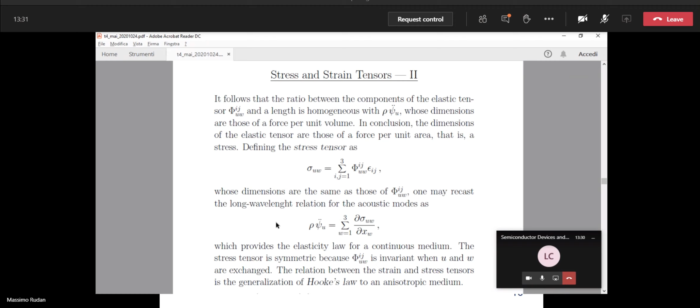Hooke's law was stated, as you remember, by the end of 1600, and substantially the first expression of it was that the tension was proportional to the force.

It is curious that at the time in which Hooke decided to make his discovery public, there was no copyright. People typically copied results from one another, so scientists liked to keep the results hidden somewhat in order to be able to reveal them at the proper time. So what Hooke decided to do was reveal his law by an impossible anagram.

The anagram is indicated at the bottom of the page. In essence, he translated the law into Latin, ut tensio sic vis, that means tension like the force, or same as the force. Vis is force in Latin. And then he simply scrambled or shuffled the letters of this sentence and put them in alphabetical order.

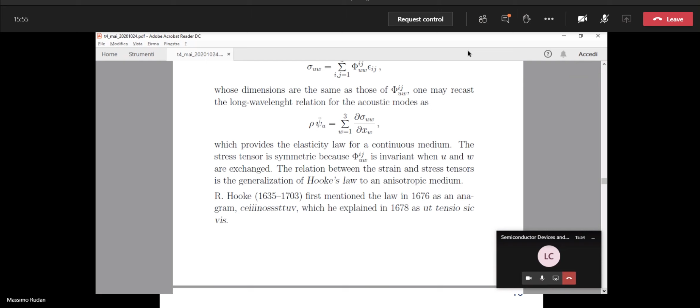So if you keep the tensor form of the law, you must express the law in the most general form, that is the one shown here. By the way, this law is a general definition that also applies to the dynamic case. In fact, sigma in the second equation visible on this page is actually the same sigma as above.

But in many situations, we don't have any time dependence of the different quantities. We have some equilibrium situation in which the material is subjected to forces, so it undergoes a deformation, but after the application of the forces is completed, nothing moves anymore. So the law also applies to the equilibrium case, and in many situations later on we shall examine equilibrium cases. We shall come back to the more general dynamic equations at the end of the analysis of elasticity, but from now on, we consider only the static cases.

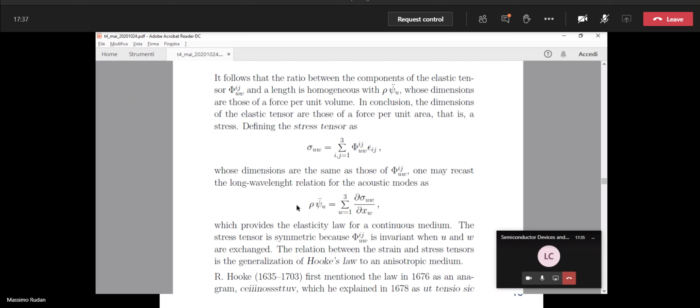Now I have to change the slide in order to go back to the slide we were discussing yesterday at the end of the last hour. So we were here. This, as you remember, is just a very simple one-dimensional application of Hooke's law.

We have a cylindrical piece of material that is elongated in the vertical direction, and the length of the unperturbed case is L0. We apply a force on the upper face while the lower face is kept fixed, and there is an elongation delta L0 of the bar. The stress in this case has only one component, the vertical one, given by the force F divided by the area A0 of the cross section.

And the component of the strain tensor epsilon is delta L0 over L0. Also, the ratio between stress and strain is called the Young modulus.

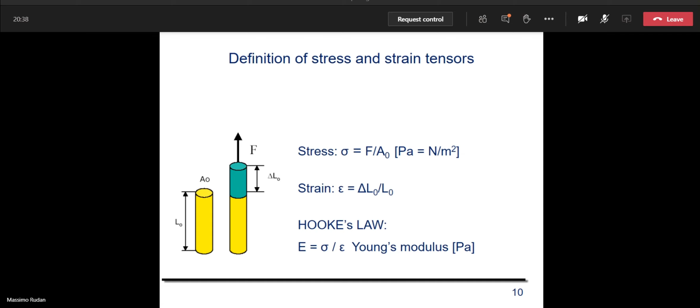Anyhow, we continue. I resume here the list of hypotheses that we already started examining. We always consider a linear response, so the relations between strain, stress, and so on are always linear. We never consider higher order terms, which implies that the deformations of the material we can consider are small deformations, but this is reasonable for many applications.

The other thing is that from now on, and for a while, we shall assume that the system we are considering is in the equilibrium condition. That is, there are forces applied onto the body we are investigating, but these forces do not depend on time, and possible transients that occur at the time of application of the forces have finished. So everything is static.

But because of this, the body is not accelerating, and also the body has no rotation, not rotating around any axis or any point.

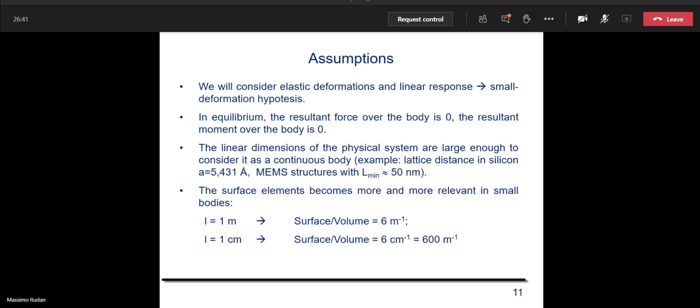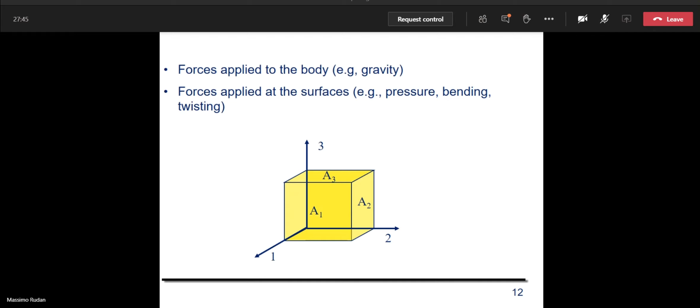The forces applied at the surfaces, which could be of the type of pressure, bending, or twisting, condense into the stress tensor.

Consider any face of the prism, and consider that on this face we have a force. You remember, in general we have both a force and a torque, but when we make the block smaller and smaller, the torque becomes not relevant. So we are considering only the force.

On each face, there is a force acting, and this force is not necessarily normal to the face. In this figure, what you see is just the normal component to each face, but in the next figure we shall see the parallel components to the face. So for each face we have a general force applied, and we decompose it into the normal component, shown here, and into the parallel component, which we shall examine next.

The component normal to the face is divided by the area of the face. So if you take the face to the right, the force applied to it is F2. When we divide it by the area A2, we obtain the so-called normal or axial stress of that face. So we call it sigma 2,2.

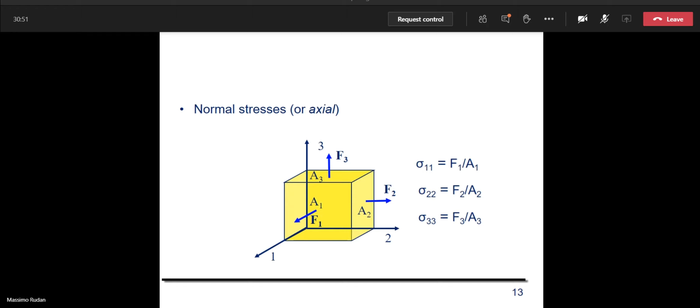In order to impose the equilibrium condition, we must find out the relations among these components. Now we go to examine the components parallel to the faces.

So in this figure, what you see is that we are considering only face A1, that is the face that is in front, of the prism. And all 3 components are drawn in the figure.

F1, as in the previous page, is the component of the force normal to A1. F2 is the component that belongs to the plane of the face and is parallel to the second coordinate axis, x2. And finally, F3 is the component that still belongs to the plane of the face A1 and is parallel to the third coordinate axis.

So then we already have defined sigma 1,1, that is F1 over A1. Then we must define the other two, F2 over the area A1 and F3 over the area A1. And of course, these will have two different indices, sigma 3,1 and sigma 2,1. So actually the index of the face comes second, and the indices of the axis come first, but it doesn't really matter because we shall see in a minute that this tensor sigma is symmetric.

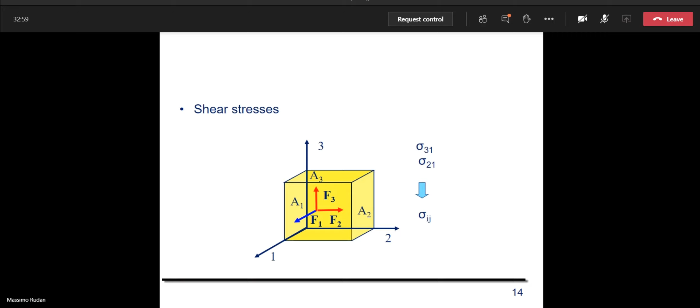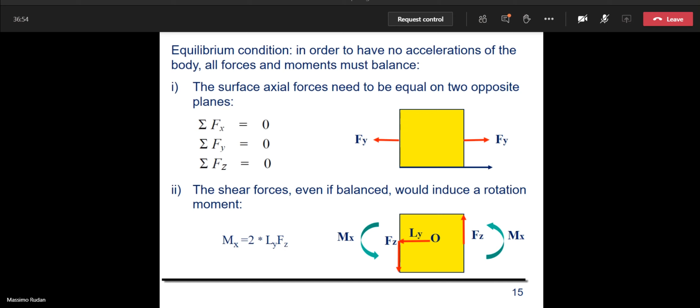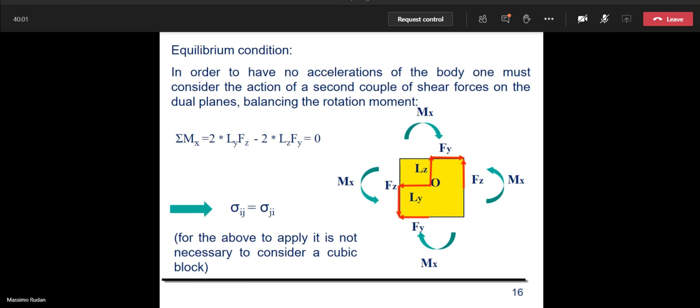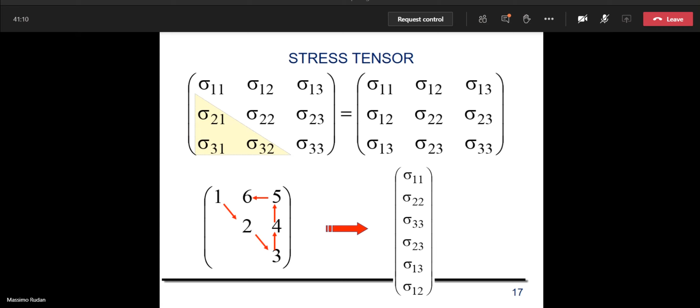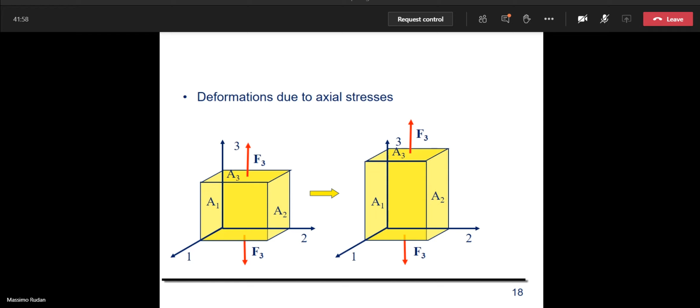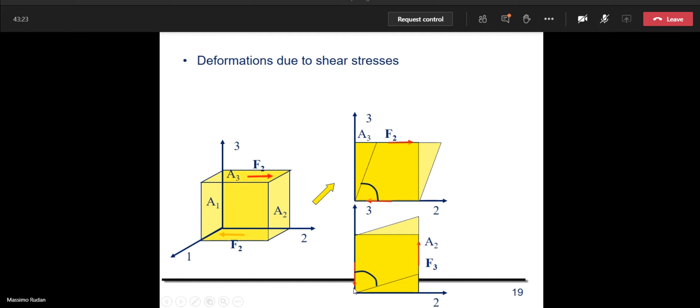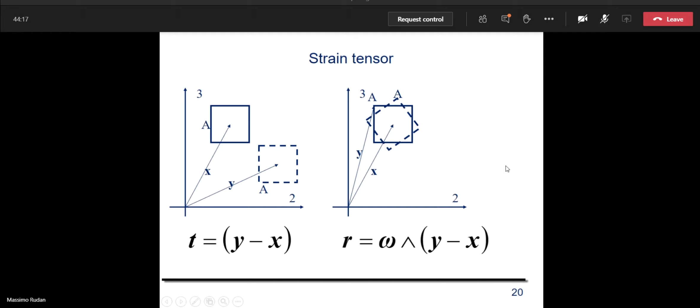We are going to skip this figure and the next one because they refer to a discussion we have already done, that is, we always neglect the possibility that besides the deformation, the block of material also undergoes a rigid translation and/or a rigid rotation. A rigid translation is the one depicted on the left, and the rigid rotation is the one depicted on the right. These things always occur, but we simply neglect them. We consider only the local deformations of the body.

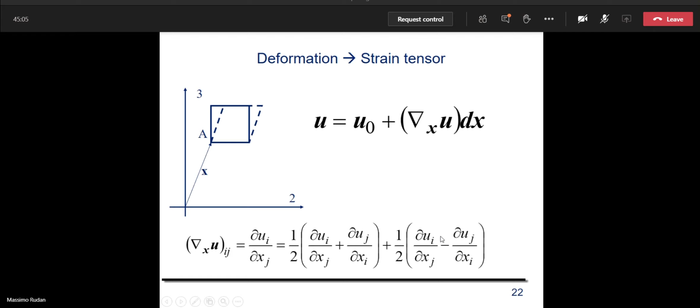At some point we defined, using different symbols but with the same concept, the strain tensor - it is the first parenthesis here. The symbols are different because in the other slides we had psi, but here we have U; it is the same thing. The other part is the anti-symmetric tensor that describes the rotations, and this is the one that is neglected.

It was called theta, if you remember; here it is called omega, but it is the same. From now on, we shall consider only the strain tensor. And the strain tensor is symmetric.

So also in this case, out of the 9 components, there are only 6 that are independent from each other. We also rearrange this as a vector, and the reason is that when we want to describe the relation between strain and stress, you remember this is done using the elastic tensor. We have a simpler representation of this relation: a vector equal to a matrix times another vector.

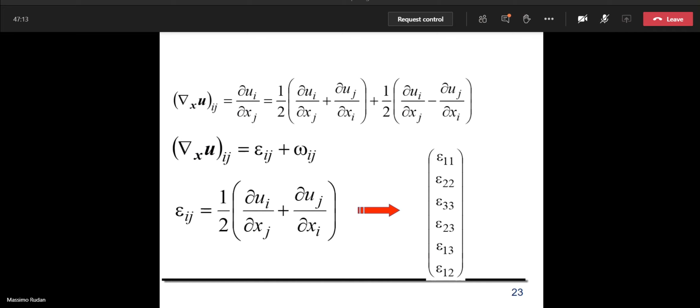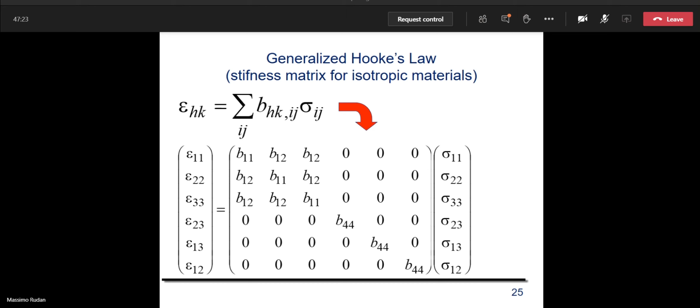This is it. The symbols are a little bit different because in the other slides, the components of the elastic tensor are called capital phi, okay? Here they are called small b, but the concept is the same. It is a 6x6 matrix.

The first block is a 3x3 matrix in which the diagonal elements B11 are equal to each other. The remaining six non-diagonal elements are called B12, equal to each other but different from B11. The rest is made of another block that is purely diagonal, in which the diagonal elements are called B44, and they are equal to each other but different from the rest. All the rest of the matrix is made of zeros.

This is also called the compliance matrix, as you can read on top. In the typical theory of elasticity, they don't use these symbols B, nor the symbols capital phi. They use other symbols that are visible below, but they are also mentioned on the next page.

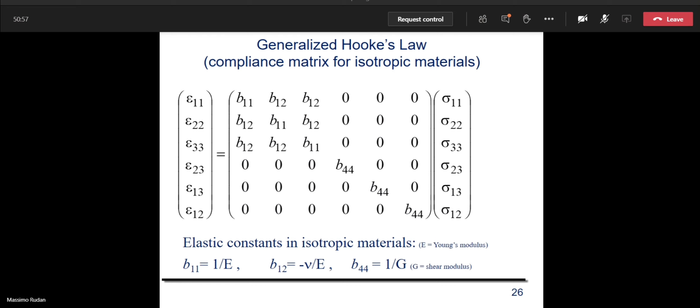The definitions are also in the next page. So the matrix associated to the elastic tensor is called the compliance matrix. It is the matrix that, multiplied by the stress tensor, provides the strain tensor. The inverse of this matrix is called the stiffness matrix, so the stiffness matrix multiplied by the strain tensor provides the stress vector.

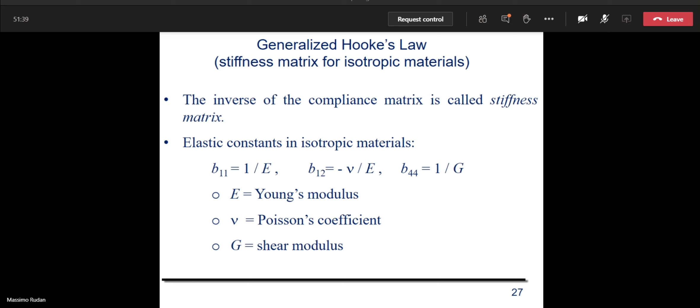And the names of the constants are repeated here: the Young modulus, the Poisson coefficient, and the shear modulus. Now, the equations are already discussed, so we don't go through any equation.

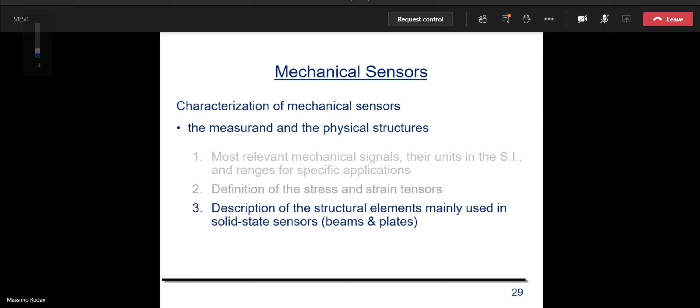How do we apply these concepts? Remember, we are talking about microelectronics, okay? So, of course, we must be able to find microelectronic structures in which we can realize mechanical things that can bend or deform. And essentially there are two of them.

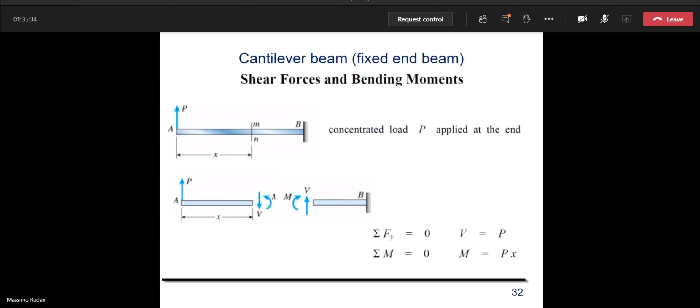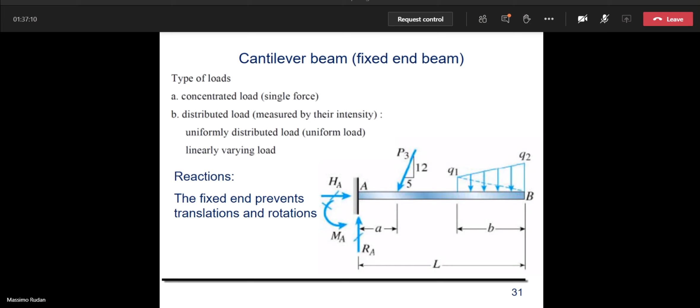So the cantilever is also expected to deform horizontally. If the component of P3 pushes to the left, the cantilever will become shorter. But in a situation like this, the deformation along the axis is less important, is of higher order than the bending of the cantilever. But actually, if the loads have two components, then there will also be an axial component of the stress inside the cantilever.

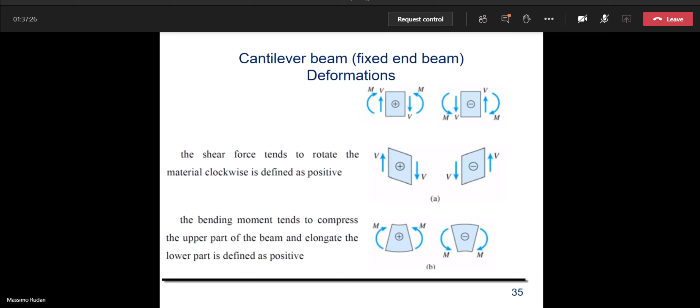This slide simply describes the way we take the signs, but it is not important for what we want to say.

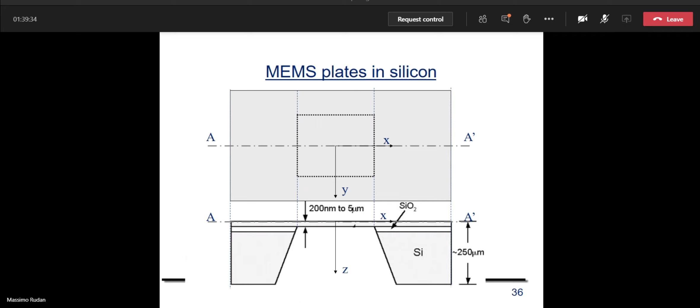The theory of the plate is not easy. We are not going to develop any theory of the plate. One important theory to describe the behavior of a plate under a distributed load is due to Kirchhoff, but I'm not going to work out the equations or the solution of the equations.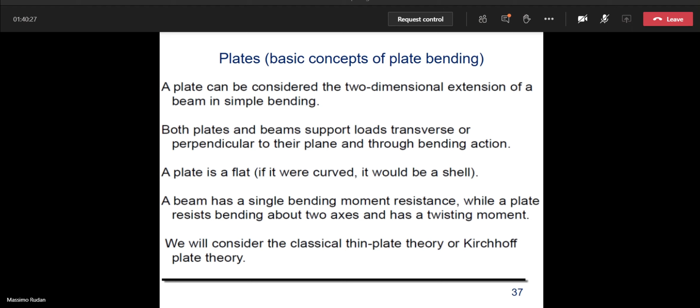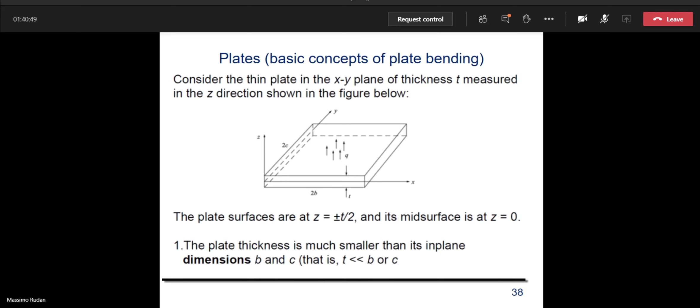I just want to show you some simulation results relating to a plate made of silicon. The theory of Kirchhoff assumes, as we already anticipated, that the lateral dimensions of the plate are much larger than the thickness.

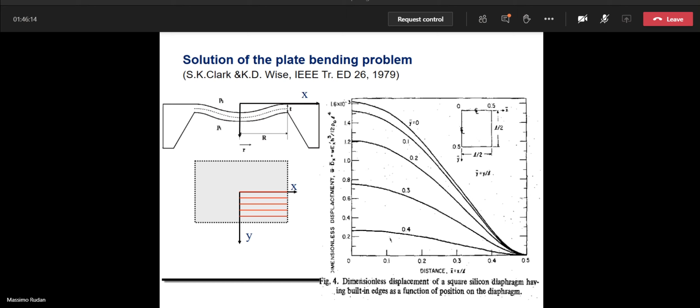This comes from a numerical solution of the two-dimensional problem of the plate according to the Kirchhoff theory. The issue is, at any position of the plate, we can calculate the deformation, and then we can connect the deformation with the stress of the material at each position inside. These are other details, but they refer to the same analysis.

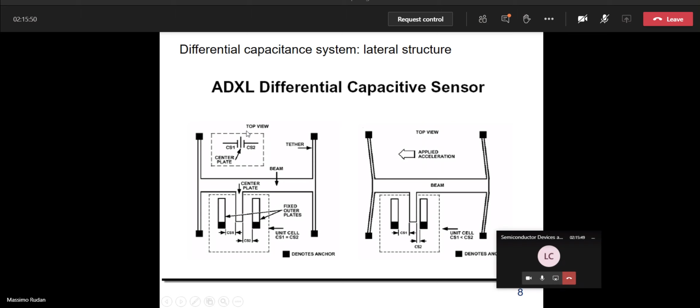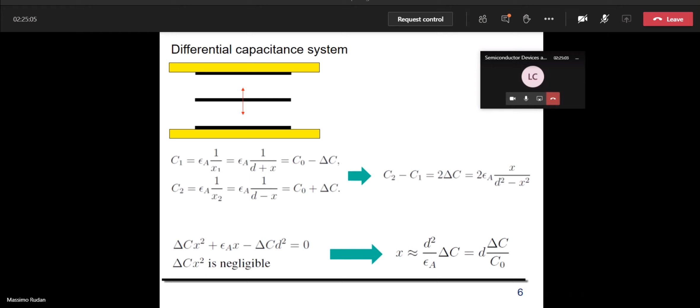And the elongation is proportional, due to the formula we calculated a minute ago, to the measured voltage of the middle plate. So eventually we have that measuring Vx is equivalent to measuring the acceleration.

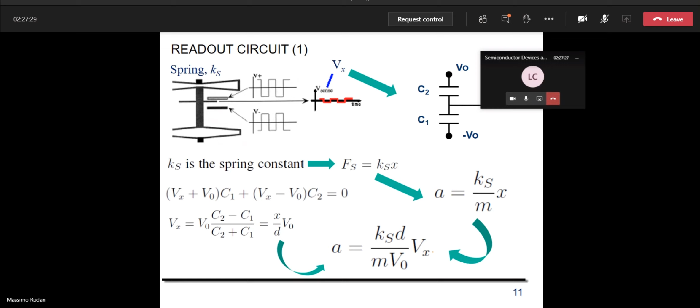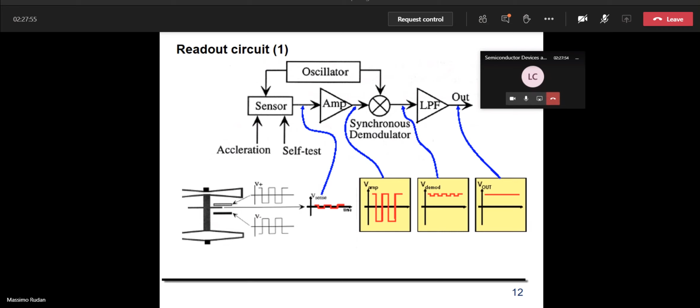But then it is adjusted electronically, so what we obtain at the end by some circuit is a signal that is constant with respect to time and different from zero. So this is a signal that is eventually proportional to the acceleration. This is how accelerometers work.

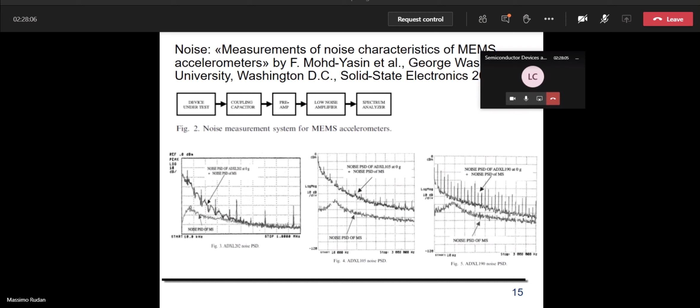Now we go to the other effect. Instead of using the change in a capacitance due to the mechanical deformation, we exploit the piezoelectric effect.

The piezoelectric effect is the formation of an extra voltage due to a distribution of charge that in some materials is a consequence of the application of a mechanical pressure. There is also the inverse piezoelectric effect, in which the application of a voltage will give rise to internal forces in the material.

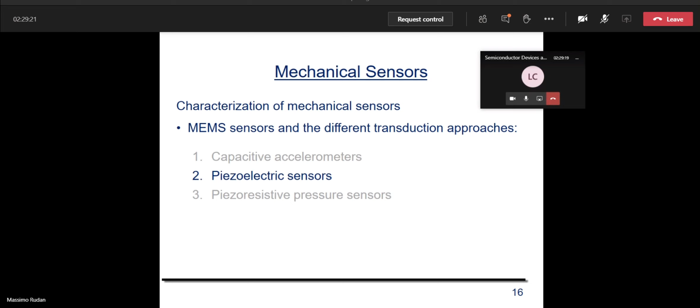Essentially, consider a capacitor in which the dielectric has a thickness equal to some h, and the area of the plate is some A. Then we are able to measure the voltage between the two plates of the capacitor, and at some point we apply some force to the material.

What happens qualitatively is the following. Assume that you are able to determine the charge, called delta Q, inside the material, or the variation of the charge due to application of the force. You remember from the Gauss theorem that the charge in the volume can be found by integrating the displacement vector D over the surface - in this case it will be the displacement vector D times the area.

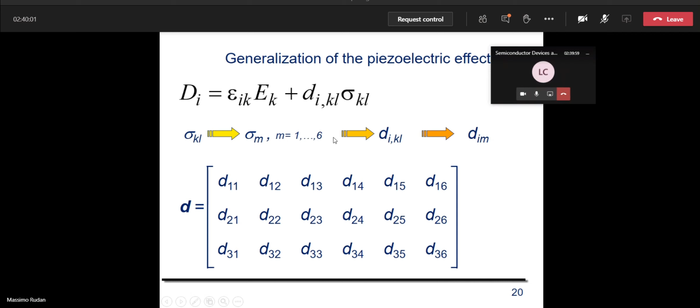So this is the form of d in general, but for the materials of interest, d simplifies very much because many of the elements are equal to 0. For instance, in silicon dioxide, there are actually 2 independent elements, D11 and D14, and then D12 is non-zero, but it is equal to D11. And then there are 2 more elements that are non-zero in the second line and none in the third line. For the other 2 materials, the situation is similar.

There are just a total of 5 non-zero elements, but only 3 of them are independent. So there are 3 different values possible.

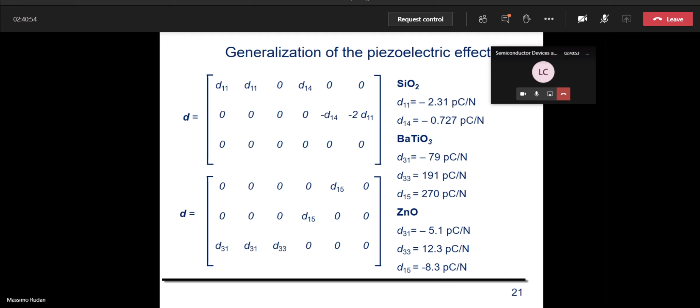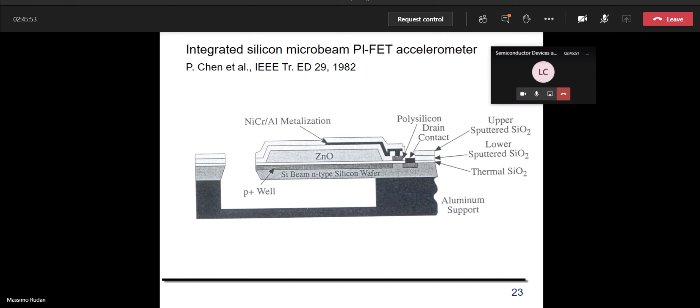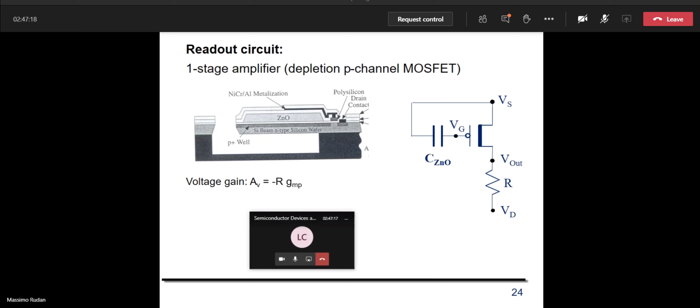This is another implementation, a different application of the piezoelectric effect, in which they have realized touch sensing devices. So those devices, when you touch them with the finger, because of the change in the voltage of the capacitance, they are able to modify the signal or current inside an MOS transistor. The principle is the same, the device is different, so the structure is shown in the next couple of slides.

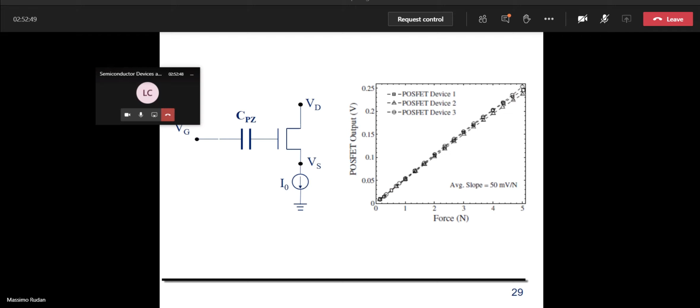It is quite linear. This is a diagram of the applied force on the horizontal axis with the output voltage on the vertical one.

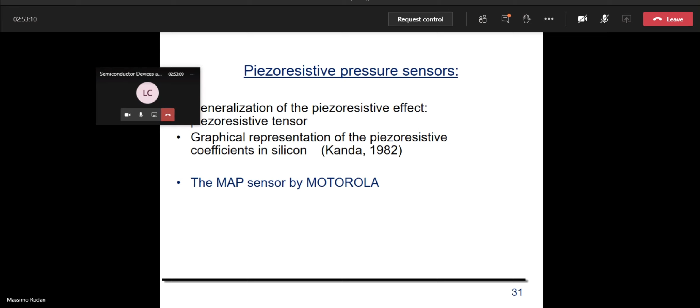We now start considering another type of sensor, still based on the piezoresistive or piezoelectric effect, but in this case it is called piezoresistive. It is again a piezoelectric effect in which the parameter that changes due to the application of an external force is the resistance, or actually the resistivity of the material. This is something typical of silicon.

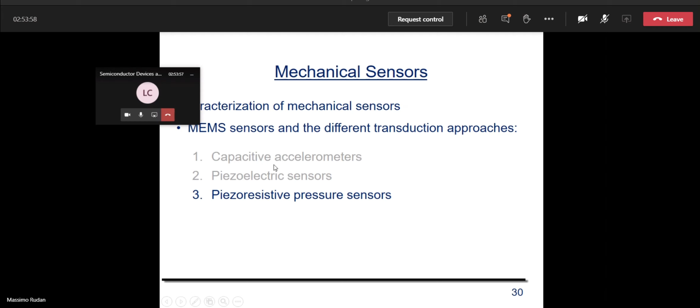So let's see why we expect that in a material like silicon, we experience a variation in resistivity due to the application of a pressure. For that, I need some old slides that I showed you several hours ago, so let me try to find them.

You should be able to see a slide showing the bands, the valence and conduction bands of silicon, germanium, and gallium arsenide. Consider silicon, that is the central part of this figure.

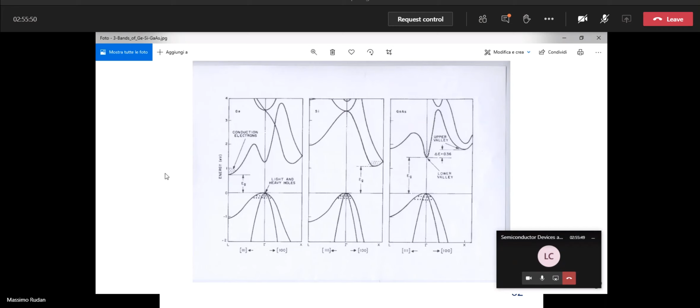Silicon, you remember, has 6 minima in the conduction band, and they are aligned 2 by 2 along the 1,0,0, 0,1,0, and 0,0,1 directions. In this figure, only one is visible because the left part of each figure is related to the 1,1,1 direction. Another figure that you may remember is this.

You may remember that the two axes that are equal are associated to the transverse mass of the mass tensor of silicon, and the other one, the other axis of the ellipsoid, that is the longitudinal one, is associated to the longitudinal mass. If you remember the numerical data, you also remember that the transversal masses in silicon are considerably smaller than the longitudinal mass.